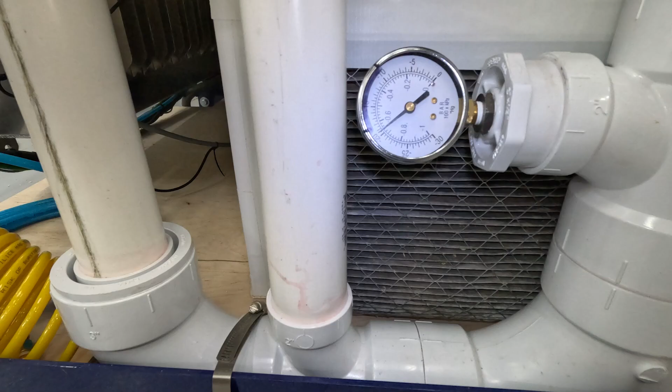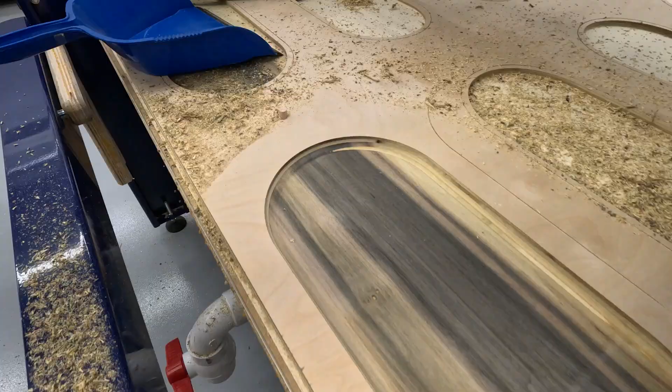Operator error. Over here I'm good, where I'm pretty flat. But over here I think that board is just coming up. It makes a hell of a lot of dust.

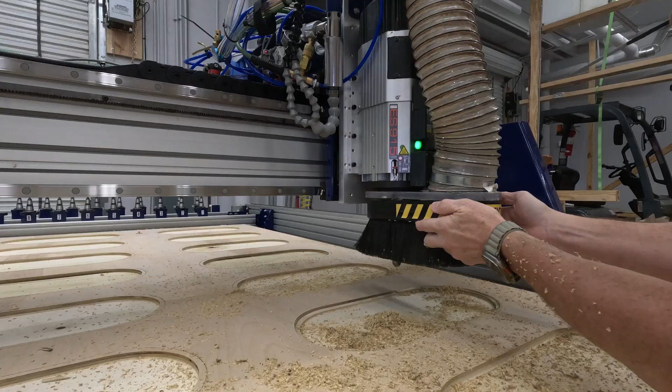Some dust skirt is better than no dust skirt. Let's let it cut the rest of the ball nose and we'll inspect at the end.

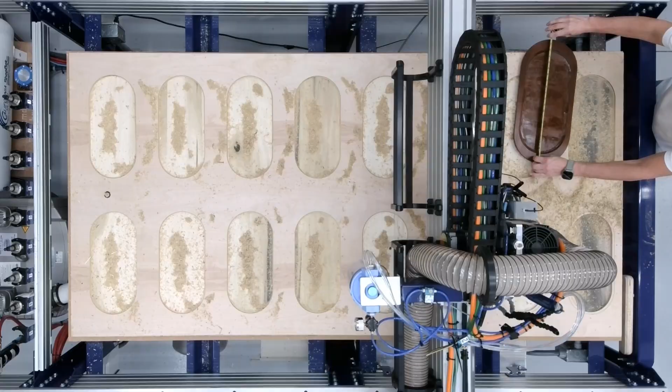Okay, so all of the ball nose profiles have run, and a couple of things. It looks really clean. A little bit of a ledge here. Not over here. Less here. Yeah, it must be something happening as we get down from 0 over to here. Not going to call foul on that just yet. So that's number one.

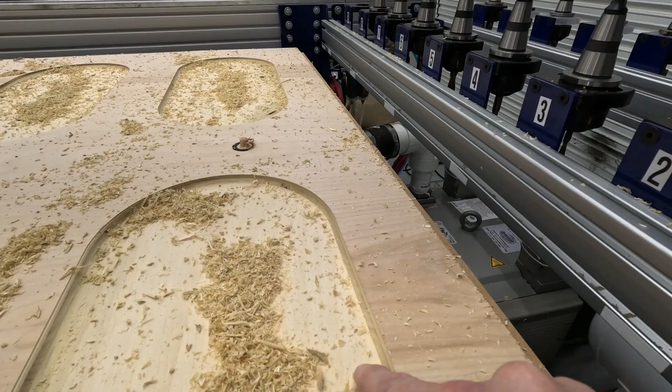It's nice to be able to look at the plywood in cross-section now with that ledge. And I do believe we're getting down deep enough for the veneer. But I'm probably going to experiment with taking that down deeper. And why I say that is because where the curve is actually starting, it's so indecipherable up here, I'll probably go a little deeper just to truly break the veneer, because as the bit's running this way, pushing versus... it's the same sort of scenario, but I want to be able to break that veneer down just a little bit further. Because I want to minimize the amount of work that I have to do post machining. So I'm really happy with all of that.

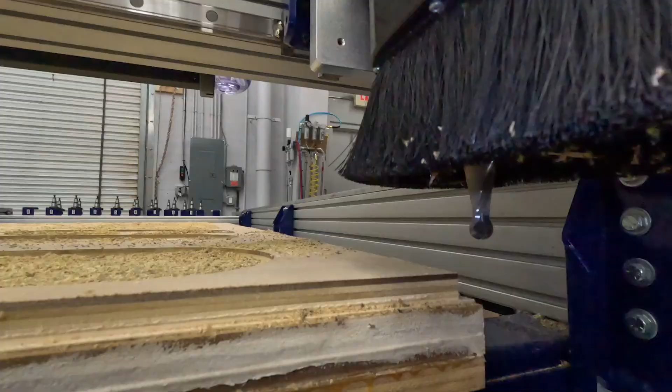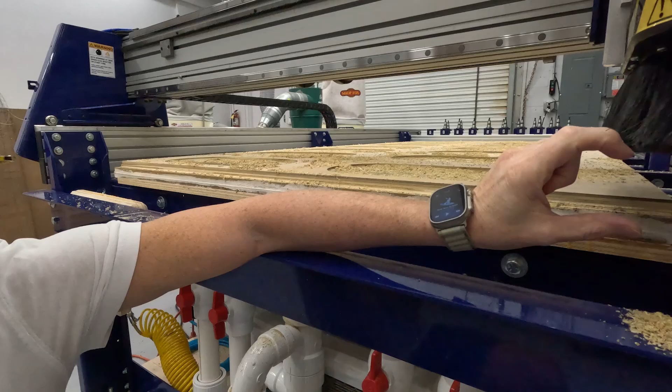One thing that occurred to me is what I'm going to request from Shopbot is additional dust boots. I can't get my dust boot down any further, and I can't get my bit up any higher. So that's every bit of 1.25 inches. So I'm going to ask if they can make me a version of this with bristles that are simply about 1.5 inches longer, and that's the one I'm going to use when I'm using that bit, or if I'm using longer bits. And in fact, you really end up needing at least probably 3 different sizes.

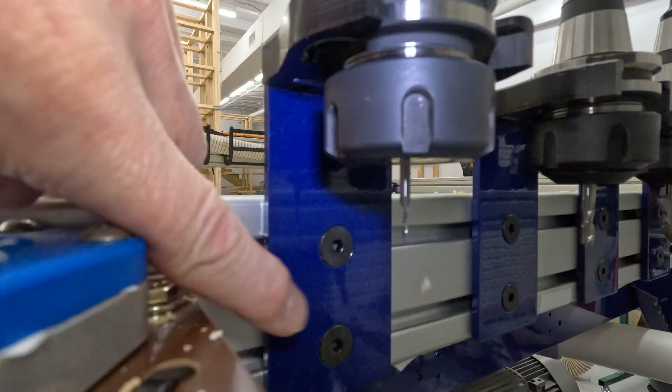Standard, super long, and then super short. Because I'm really crushing the brush down when I'm running this 1/16 of an inch ball bit that's here. I'm crushing it down, and I spent a lot of time crushing it down as well on this custom ceiling tile project, because I used that bit. How in the world do you get a square corner? Well, they're not truly square, but I made a tool path that was 3/8 by 3/8 or quarter by quarter, and all it did, 1/16 of an inch diameter, was go in and run that. So I've got a 32nd of an inch radius in there.

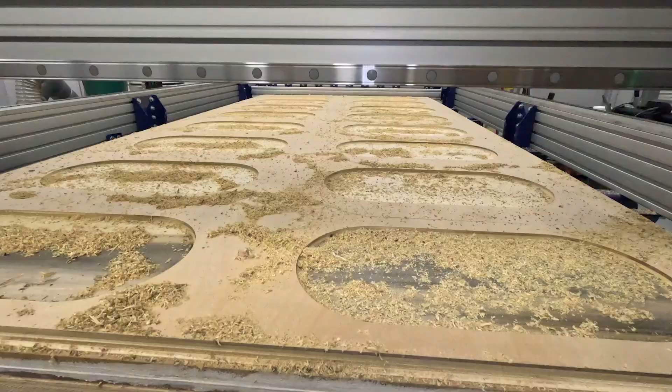And I need 100 of these, and this is just one rolling cart worth of my ceiling tiles. So it dawned on me, because I'm so epically lazy, I've got to now clean all this up. I don't want to do that. So I'm going to ask Shopbot for a custom boot.

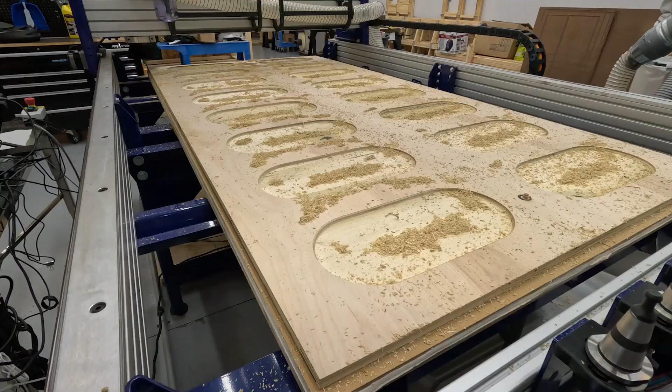Then, and it'll be a separate project, I realized I need to make a tool path, and I haven't thought about how yet I'll do it. I need a vacuum tool path. So I'm going to create a tool path where it just goes down and just vacuums the top of all this. And that's going to be put at the end of everything that I run, because, I mean, with the proper boot, with the proper dust brush on here, you're not losing much at all. But I don't like to sweep.

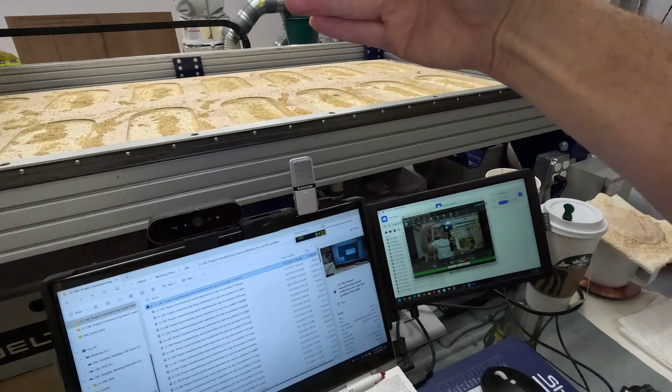What else I have, before we move to looking at where we go from here, we got to move that reference point because we hit it with our tool, that dowel. We've got to work on the balance of where we are, because I know that when we flip it, it's not going to be where it needs to be. I'm probably good, that's 2. Number 3, I'm probably going to decrease my score by 25 thousandths.

So literally this piece of plywood was bowed up. Now, this will still go to the client, but I'm probably going to make them an extra one or a couple of extra ones, because, hey, we got one and it's funny. Well, true, you ordered 50, I sent you 51. One of them is funny.

We're stepping into the unknown now. I've got to flip this part over and start running those tool paths for the opposite side. Let's just move forward.

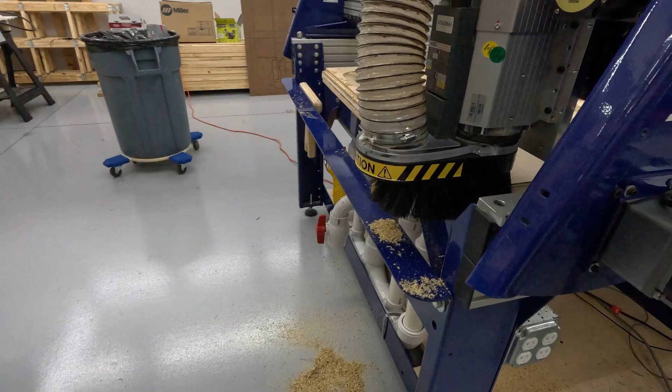Okay, don't let my capacity for being lazy astound you. I've got no tool in here, and I've got the dust boot on. And I'm at 0, 0. Let's do an MZ1. Let's just go to 1 on the Z. I sent it down to 96, and I'm super clean on one side. So I'm going to basically just run it and vacuum all that up.

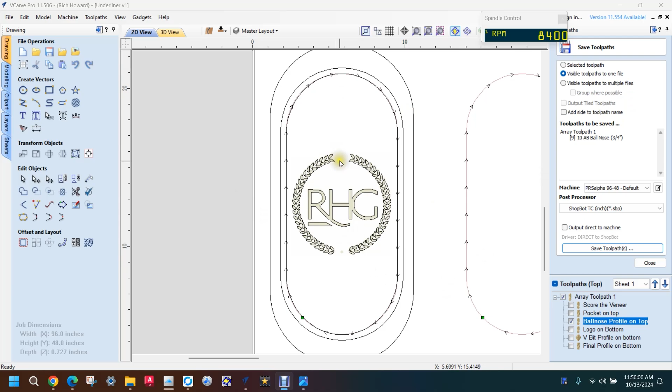So I lost my reference points when I got really confused as to why in this two-sided environment things weren't working right. When I was flipping the material, it just wasn't flipping the way that I expected. And just out of desperation, I thought to myself, well, let me at least move all the tool paths to the same face. I still have it set up as a two-sided file.

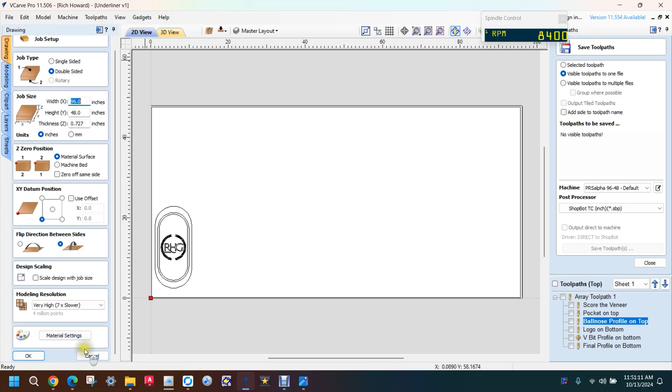And the jury is still out as to why I can't pick up my tools. Just as an aside, Shopbot came back and said they're running out of ideas. Well, I tapped the shoulder of employee number 2 at Shopbot, Chris Burns, and I've got the best in the business on the case. So we're going to update that conversation when more information comes in. There's playoff baseball happening right now, and he's paying attention to that yesterday and today. So good for him.

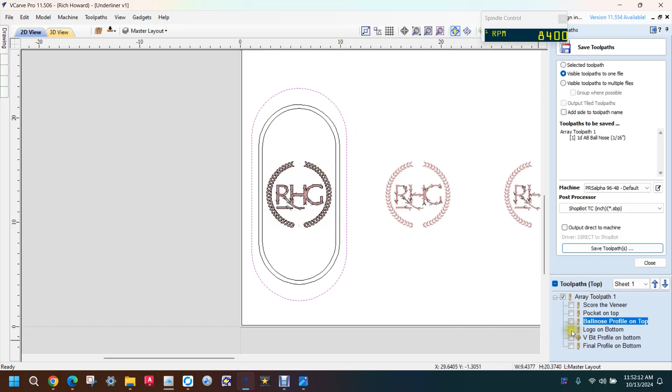So we're still set up as a two-sided project, and I have 3 tool paths left to run to finish this. What I have is the logo on the bottom to run, and I'm so looking forward to watching that run. I want to just rush to that. But I need to do the logo before I go in and do the V-bit profile, then I need to do the final profile cut. Final profile cut's going to leave some tabs for the obvious reason.

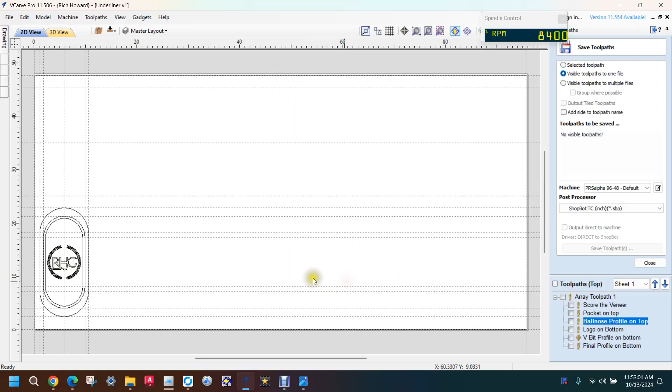So before I get into it, I do want to add some reference points, because I remember what diameter I drilled and tomorrow I may not. So this guideline should be okay. Yeah, we don't have a guideline at 24 inch. Let's put one at 24, and that's where that is. And I'm quite positive that this is coming from here. So the reference point came after the fact of what I did here. Now I wouldn't say an educated guess, I measured. If we went back and ran the tape, I measured.

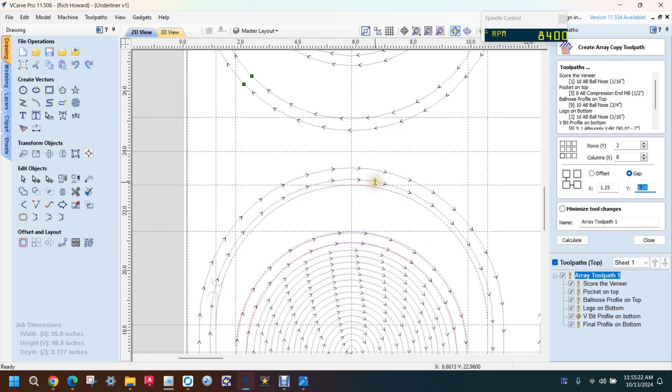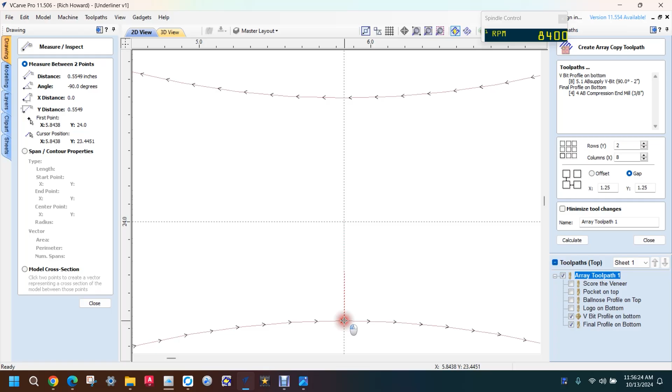But what do we have here? What we need to have is our reference point right balanced in here. And these guidelines actually don't mean anything. But when I come here and come to here, I'm at 0.6939. When I come here and go to here, I'm at 0.55. That's why I'm off. 69 to 55, that's 140 thousandths. So this first sheet's going to be off. I don't think it's going to be a tragic fail, but it's obviously not how this is going to stand.

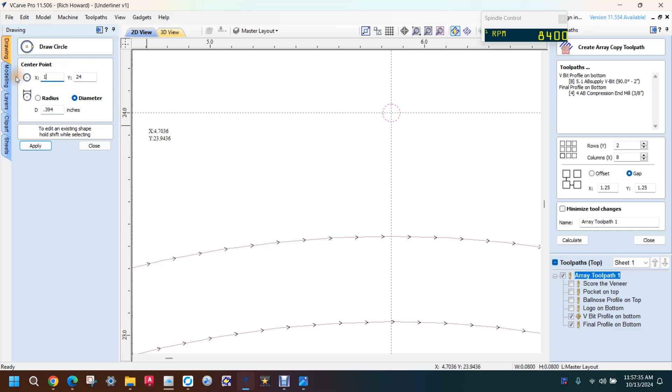So what's the issue? This guideline is at 24. This happens to be where I put the reference point vector, and that was a diameter of 0.395. I'm going to make it 0.394 at 5.8 and 24. And you know what, though? No, I don't care for that. Let's move it to 12. And the reason is, when the spindle finishes over here and comes back to 0, I want to move it out of the way. So let's apply. So here it is.

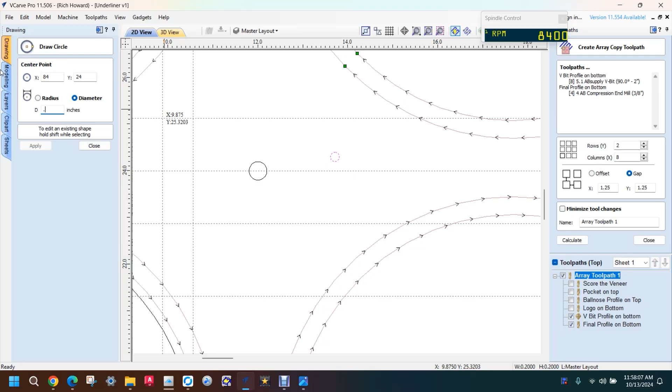Let's take another one and put it at 84. Apply. Okay, that moved it. 12. Apply. Let's take that one and let's move it to 84. 24. 0.394. Apply. So we've got a reference hole here, easier to see without the guidelines. One there, one there. Now it's out of the way. It's not going to hit anything.

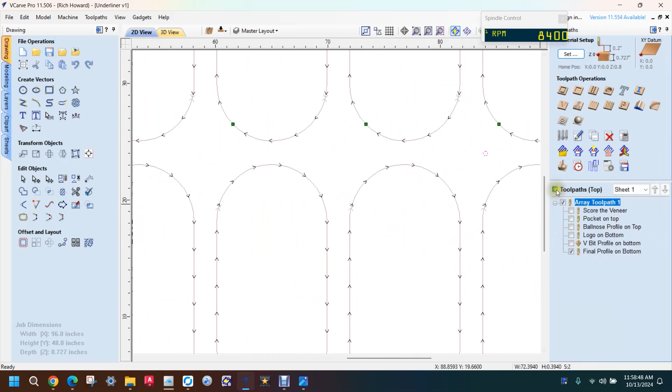And then let's just create a tool path for this now since we're here. Shift, select. Yeah, they're both selected. Close this. Let's uncheck all of this. Our 2 vectors are still selected. And we did a pocket and we went 1.09 if you recall. 0.727 is my material thickness. 0.727 plus 0.375, I want to go into my spoil board 3/8, equals, and it does the calculation, 1.102.

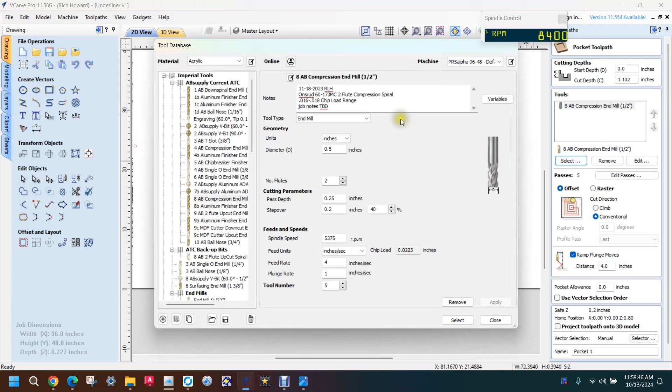Select. This was bit 2, and that was an aluminum finishing bit. I'm good with that if you're good with that. That was a 1/4 inch. That's in tool 2. 1/4 inch aluminum. Yeah. Let's select.